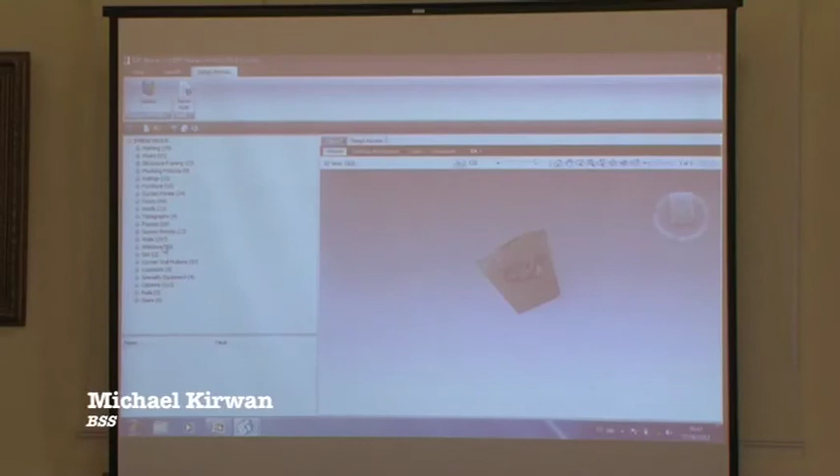So what we can actually do is, I'll open up a very small model that we've done here and show you. As we import the model into a reader, all the object information is read directly in from the model, so all the information provided in the model is there for us to utilize. On the right hand side we get the graphical view, where we can zoom it up and manipulate it around as need be.

It's fully interactive. Now I've actually chosen a very small model. Every time I come, there's always big, huge, massive projects up on the screen with buildings and everything. It doesn't have to be, it can be a villa, you know what I mean. It's down to the level of information put into it.

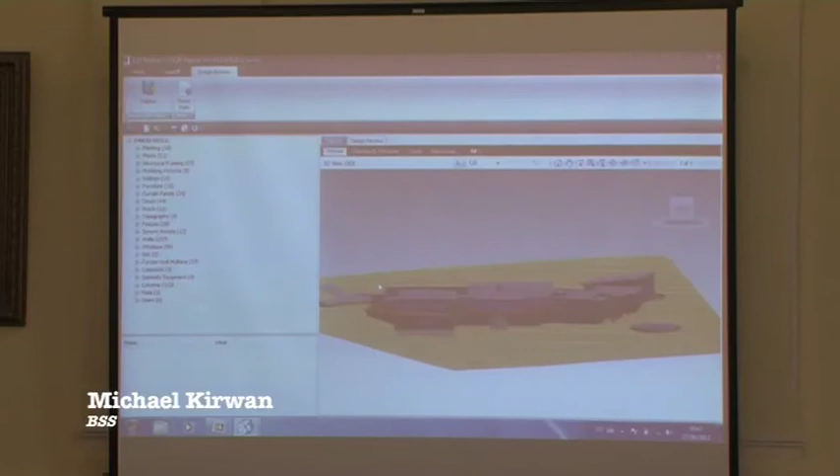So very quickly, just to show you the information is within it. As I say, all we're doing is interrogating it, isolating what we need, and taking that quantity information back out to our 2D, back out to our bill production estimating system. Or even if you want, we can actually dump it directly out to Excel.

If you don't use our estimating system and you use Excel, that's fine. Excel is still the biggest bill production system in the world.

As I was saying, they're totally interactive. So if you click on something on the model, it will locate it on the item. You can see it highlighted there, and the object properties are visible down the bottom. We can see any of the constraints that are applicable to that item, the location, and also the quantity information that is in the model.

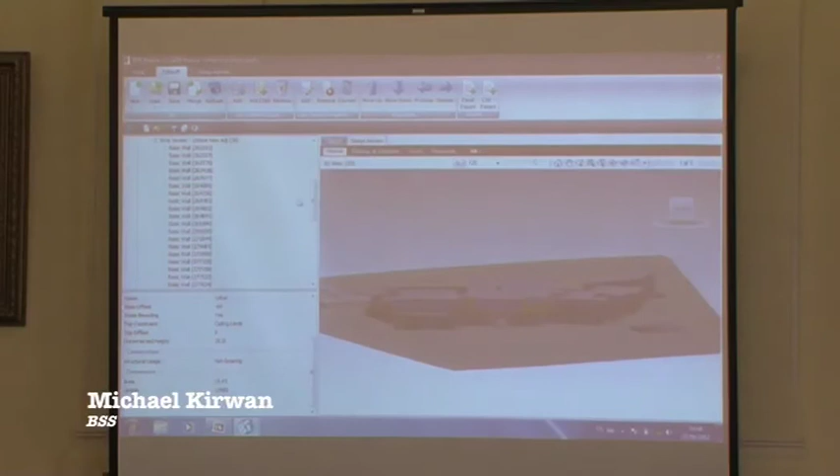Now what do we do with that information? We don't have a standard in Ireland yet for modelling, we don't have COBie or anything like that. What we've got is design models.

So we've introduced a takeoff tool that allows us to go in and pick and choose what quantity we want from the model. We can also change the alias here of the actual item. They're looking at the object names, their family names built into the design software. We can't amend the thing, but we can apply aliases to allow this to be what we want to call this item coming back. Now, I'm very limited on time, so what I'm actually going to do is, as Gay Byrne used to say—

Here's one we produced earlier. What I've done on this model is I've just gone through and isolated the area, the walls, the door openings, the roof areas, and the count of the windows for it. So I've already done it.

If I was to click on the roof there, or actually say the walls, you can see that I've got external block work. As I expand down through the item, I've given each one a particular different alias, and I've isolated the area of the wall.

So to return that data, I just simply have to return. What that does is it brings that information back to our 2D takeoff.

Where I'm able to now manipulate 2D drawings to measure any non-model items. As I expand down through the item, I can get a list of all the different areas, whether it's the door, count of the door types, the area of the walls, the area of the roofs, etc.

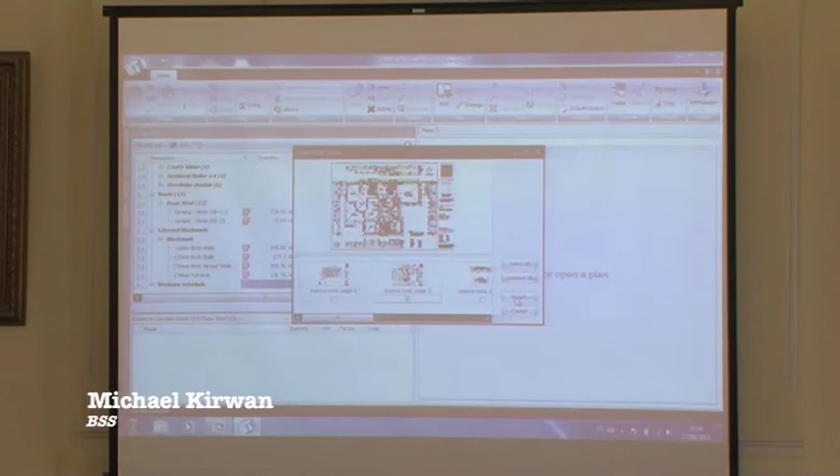As I was saying, still today a lot of people are receiving the drawings in 2D. So just to give you a quick look, what I'll do is I'll load in a PDF document. Neville pointed out, wouldn't it be great if we can still even produce—then it eliminates your intellectual property right thing. So very quickly, just to show you, I'll load in the PDF. Obviously, because it's a PDF, it doesn't have a scale, so we'll quickly set our scale.

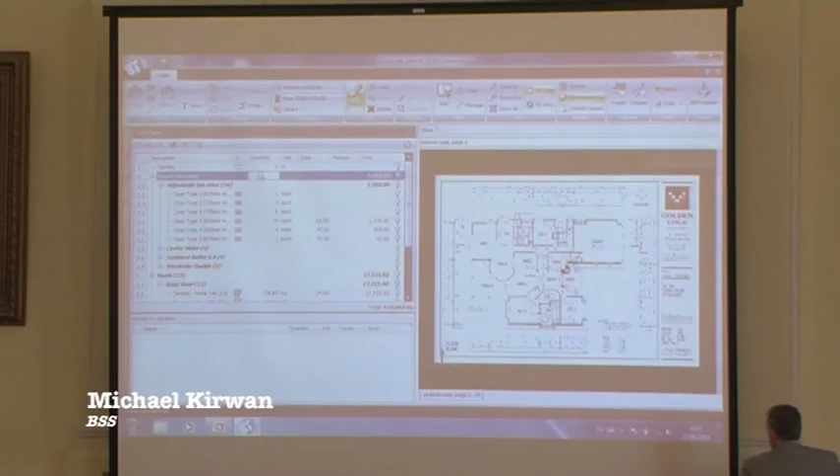Again, you're just taking a distance on the drawing to calibrate it. So if I was to insert a new item, let's say at the top there for a non-model item, traditional non-model item, maybe the skirting, and we want to take off the lineal length. I'll just zoom up here and we'll just measure. Very simply, nothing major.

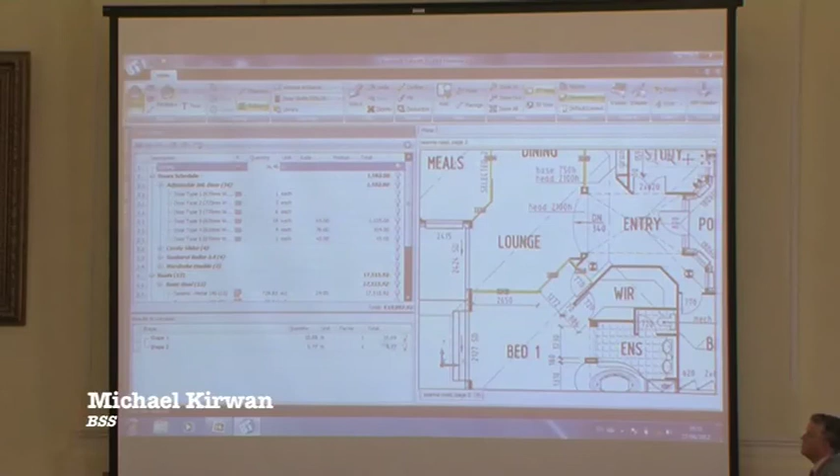All we're doing is we're measuring from our takeoff using our 2D, and we're able to continue around the walls. If we wish, certain ones of these walls might need to be factored by 2 because it could be both sides, etc. You can apply it.

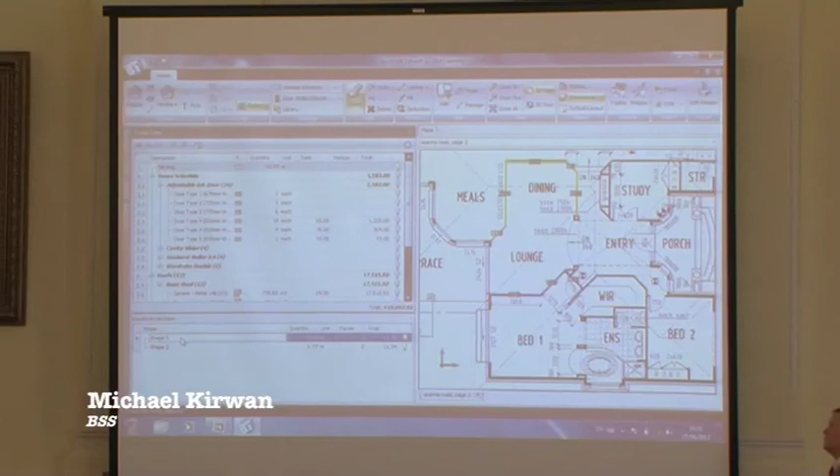So the 2D allows you to be able to measure non-model items, but also link it with the model takeoff. So you might have your 80% of items thing and still have the 20% that you want to traditionally measure, and you might also use the 2D as a check. There's still that fear of, how do I trust the quantities? Well, you see, you can use the 2D to measure. As the guys said, they produce the model, but they're also still being able to provide the 2D drawings for us as a check.